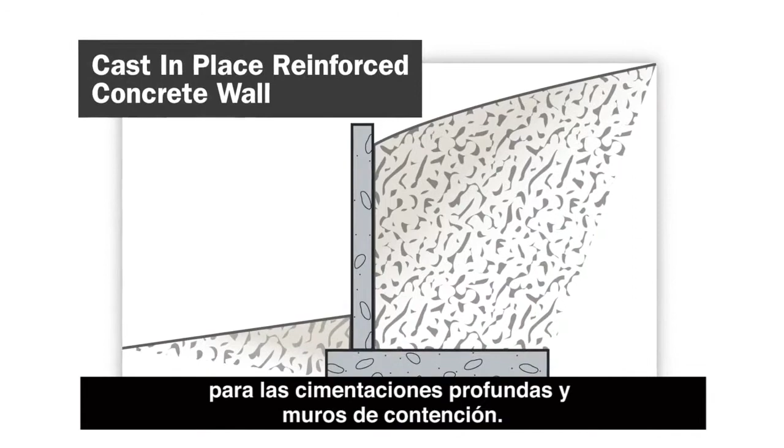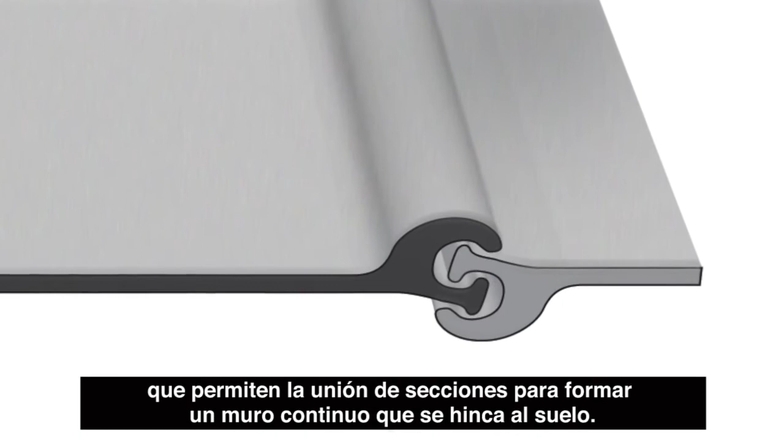Many different deep foundation and retaining wall solutions are available to engineers. Among the most accepted options is steel sheet piling, which by definition is a structural steel section with interlocks on the flange tips, enabling the joining of sections to form a continuous wall that is earth-tight. Sheet piling can be used in temporary or permanent applications for marine, environmental, and transportation projects.

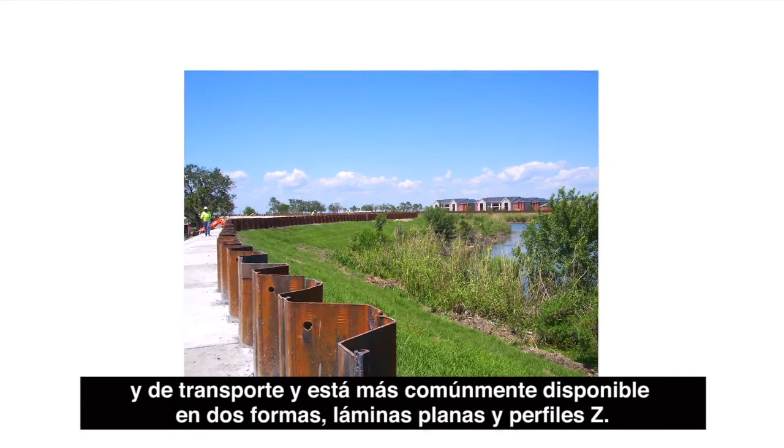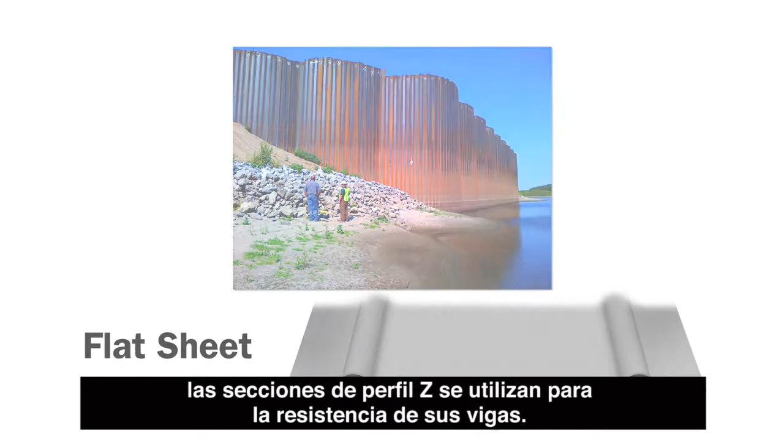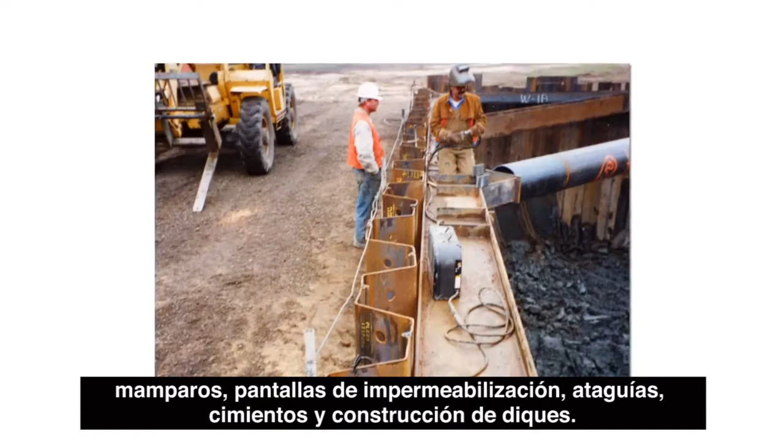It's most commonly available in two shapes: flat sheet and Z-profile. While flat sheet piling is used for interlock strength in circular structures, Z-profile sections are used for their beam strength. In essence, they are like a wide flange beam, in that each section has flanges and a web, the geometry of which gives it strength. These sections are typically used in bridge abutments, retaining walls, bulkheads, cut-off walls, cofferdams, foundations, and levee construction.

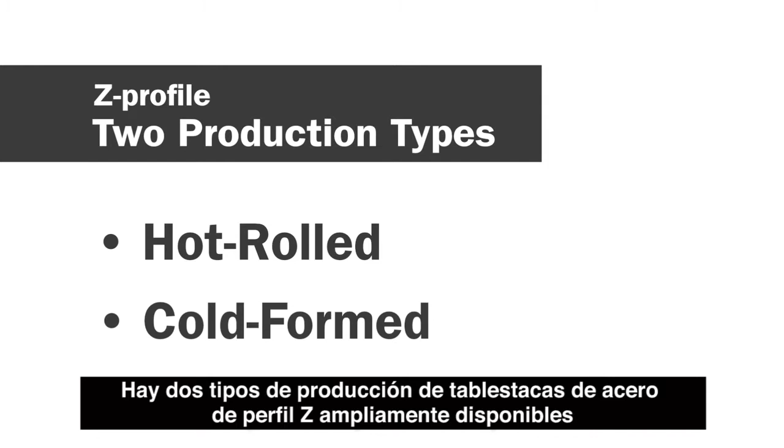Two production types of Z-profile steel sheet piling are widely available: hot-rolled and cold-formed. The important distinctions between the two can mean the difference between a successful project and one prone to problems. The names of each production type are generally descriptive.

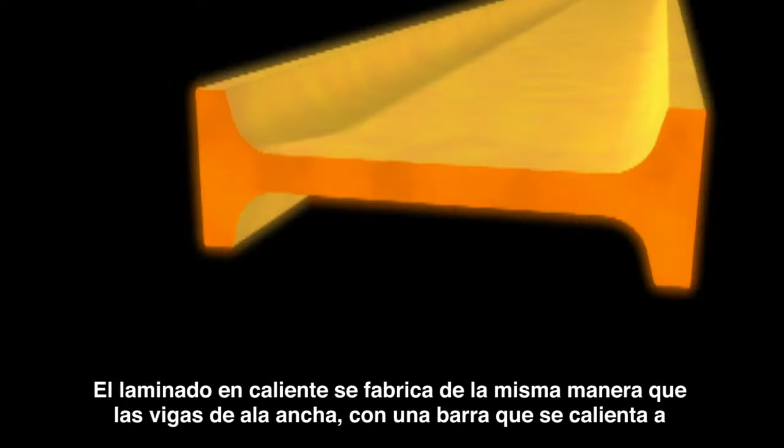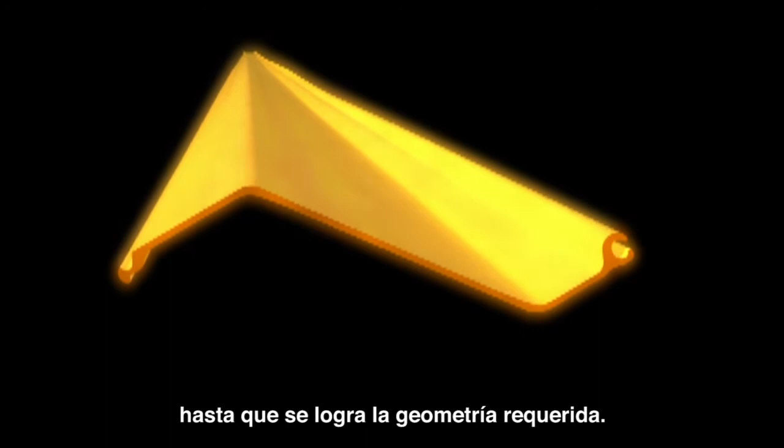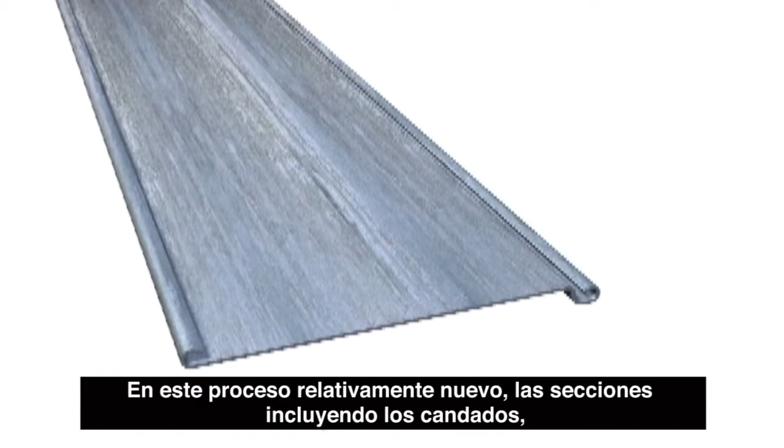Hot-rolled piling is manufactured in much the same way as wide flange beams, with a billet heated to approximately 2200 degrees Fahrenheit passed through a series of roll shapes until it achieves the required geometry. Cold-formed piling sections begin as cold steel coil, which is decoiled and sent through multiple rolling stands without preheating. In this relatively new process, the sections, including interlocks, are literally bent into shape.

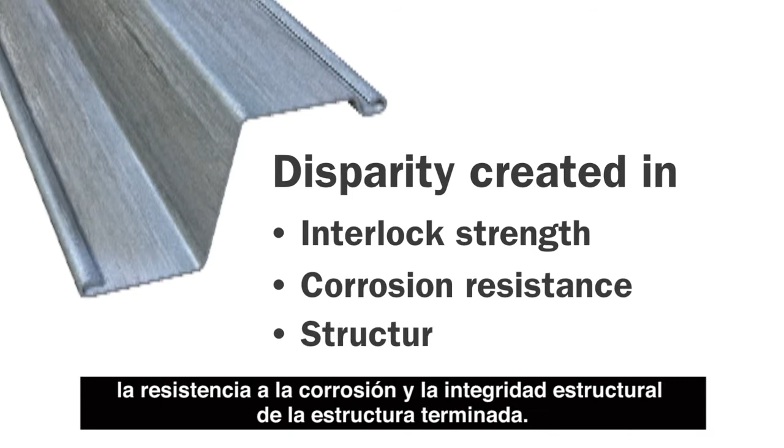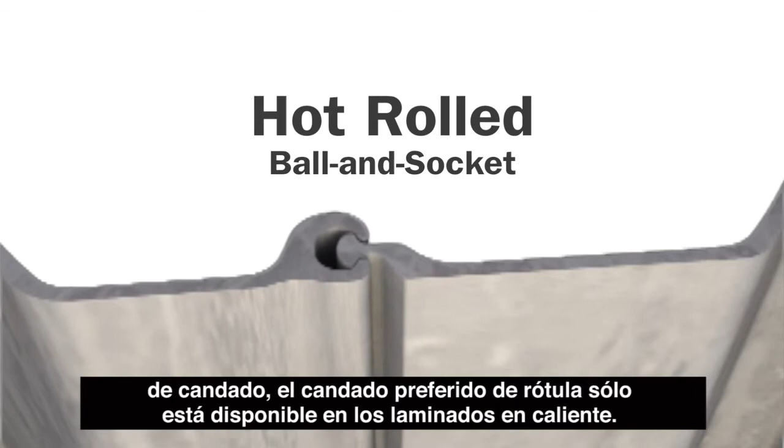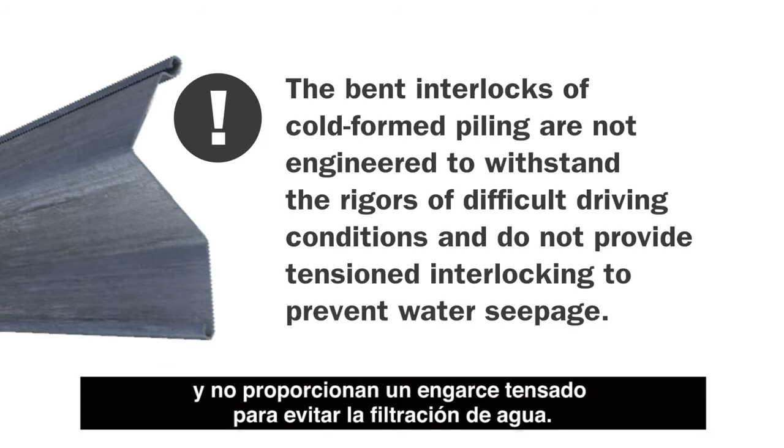The difference in manufacturing process creates a tangible disparity in the interlock strength, corrosion resistance, and structural integrity of the finished structure. While both cold-formed and hot-rolled piling sections feature interlocking connections, the preferred ball and socket interlock is only available with hot-rolled piling. Additionally, the bent interlocks of cold-formed piling are not engineered to withstand the rigors of difficult driving conditions and do not provide tensioned interlocking to prevent water seepage.

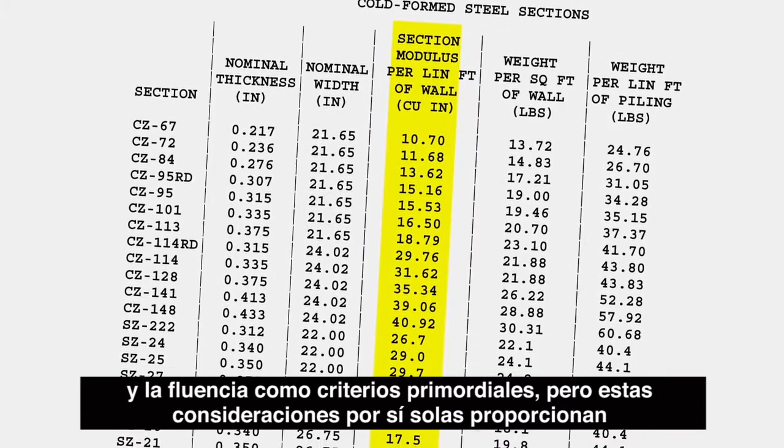To design a structure with sheet piling, engineers commonly look first to section modulus and yield strength as the primary criteria, but these considerations alone provide an incomplete picture of structural integrity requirements.

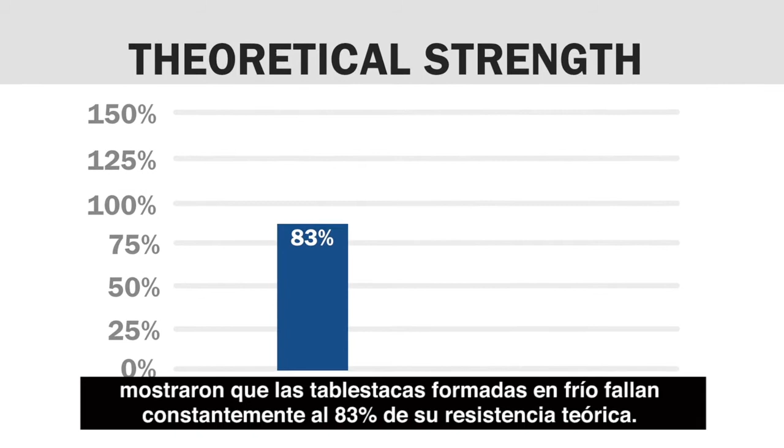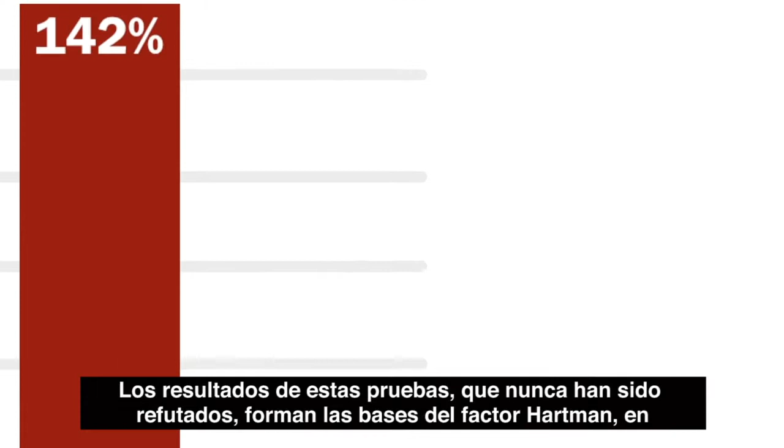Studies conducted by Dr. Richard Hartman at the State University of New York, Buffalo, showed cold-formed piling consistently failing at 83% of its theoretical strength. Conversely, like-sized hot-rolled piling was shown to maintain structural integrity up to 142% of theoretical strength. The results of these tests, which have never been disproven, form the basis of the Hartman factor, in which a factor of 0.83 should be applied to the strength properties of cold-formed sheet piling.

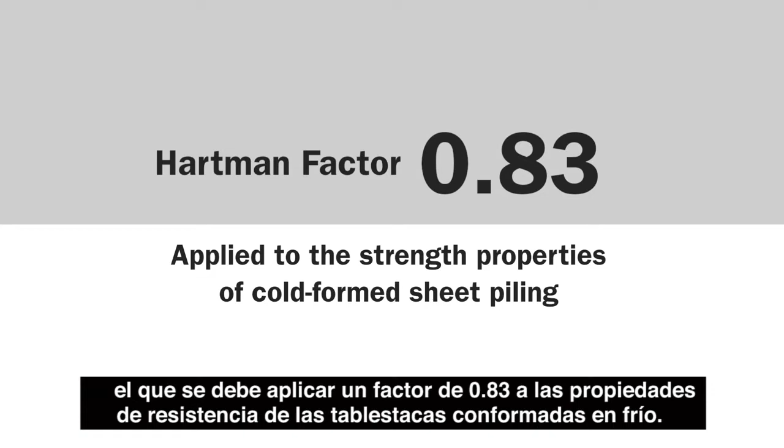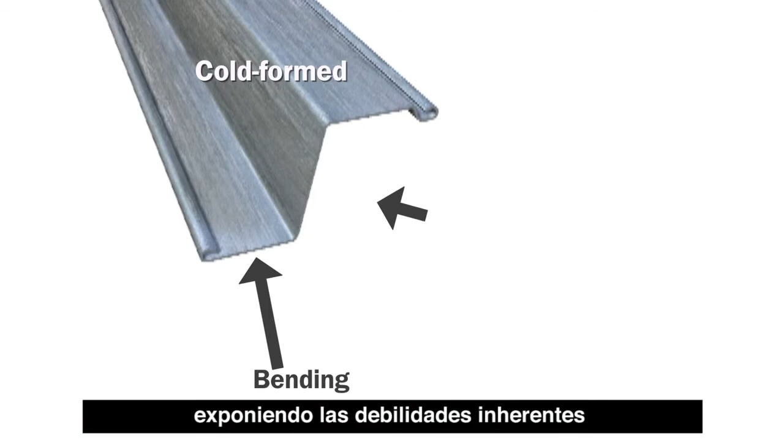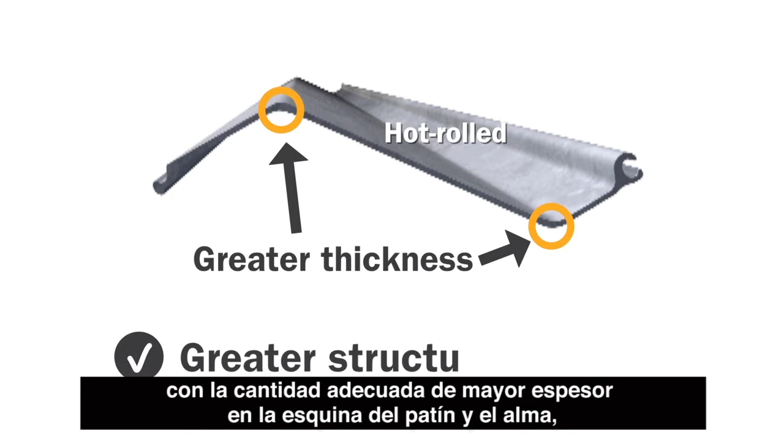While engineering calculations may account for the theoretical bending moment of a sheet piling structure, Dr. Hartman's study demonstrated additional transverse stresses on the wall, exposing the inherent weaknesses of cold-formed piling at the bends or corners of the piling sections. The production process of hot-rolled piling allows for a design with the appropriate amount of greater thickness at the corner of the flange and web, providing greater structural integrity than is possible with cold-formed sections.

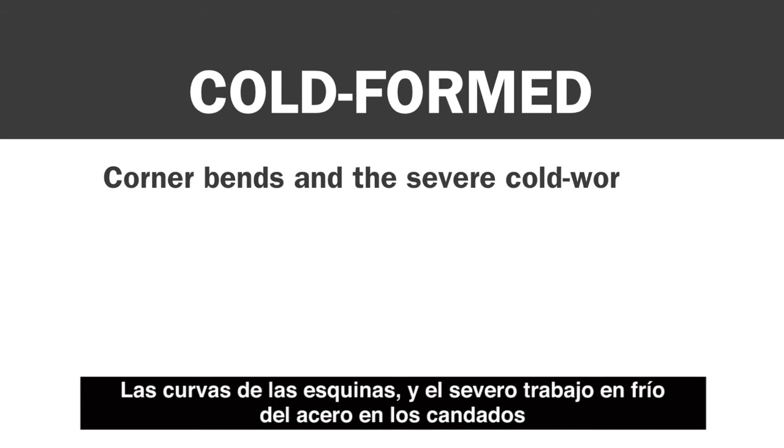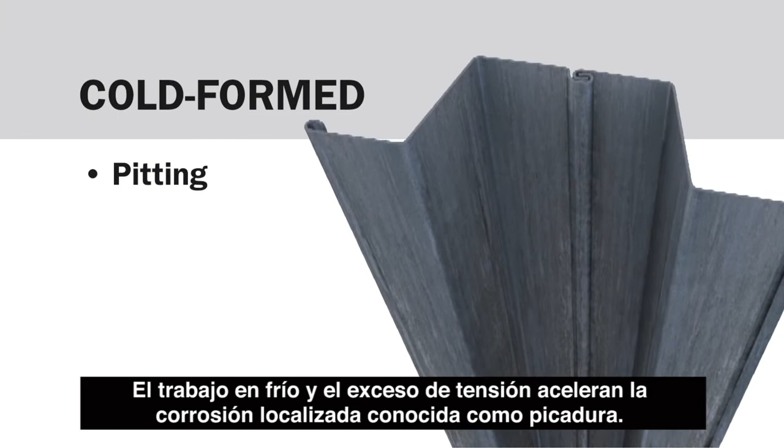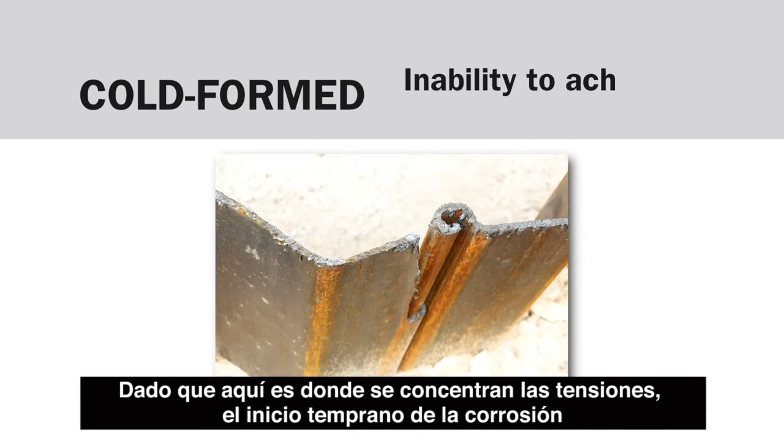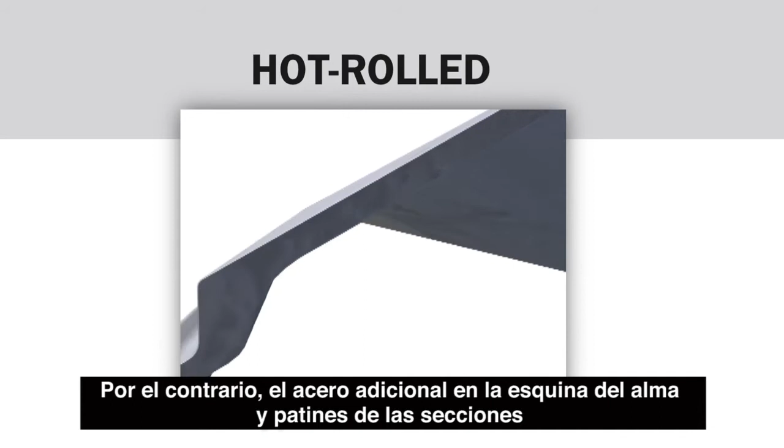The corner bends and the severe cold working of steel at the interlocks of cold-formed piling present another significant concern for the specifying engineer: corrosion. Cold working and overstrain accelerate localized corrosion known as pitting. Cold-formed sheet piling is therefore more susceptible to corrosion at the bends. Since this is where the stresses are concentrated, the early onset of corrosion will mean an inability of cold-formed sheet piling to achieve their design life. In contrast, the extra steel at the corner of the web and flanges of hot-rolled sections provide the capacity to manage the localized stresses.

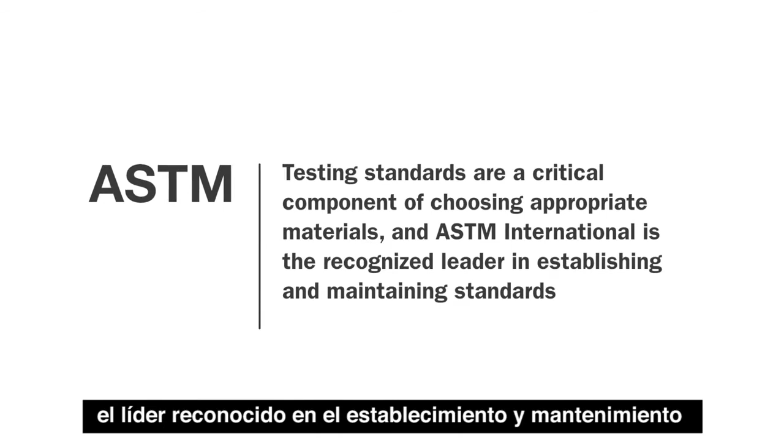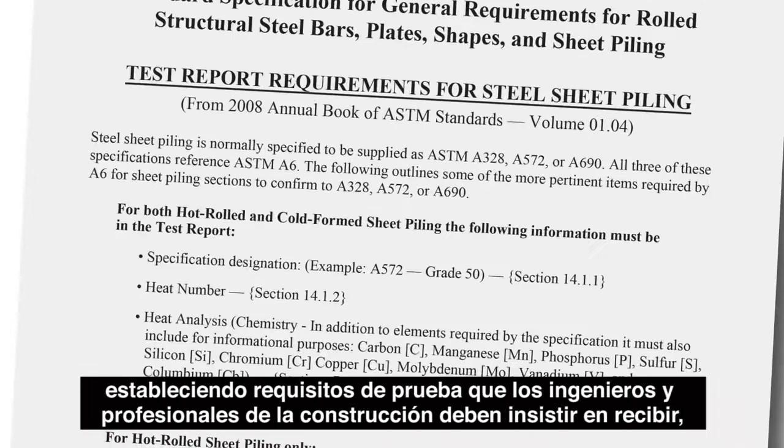Testing standards are a critical component of choosing appropriate materials, and ASTM International is the recognized leader in establishing and maintaining standards for manufactured products. ASTM Standard A6 deals specifically with rolled structural steel sheet piling, establishing testing requirements that engineers and construction professionals should insist on receiving, including grade of steel, heat number—a designation of exactly when and where the raw steel was created—heat analysis, detailing the specific steel chemistry of the heat, and nominal section size.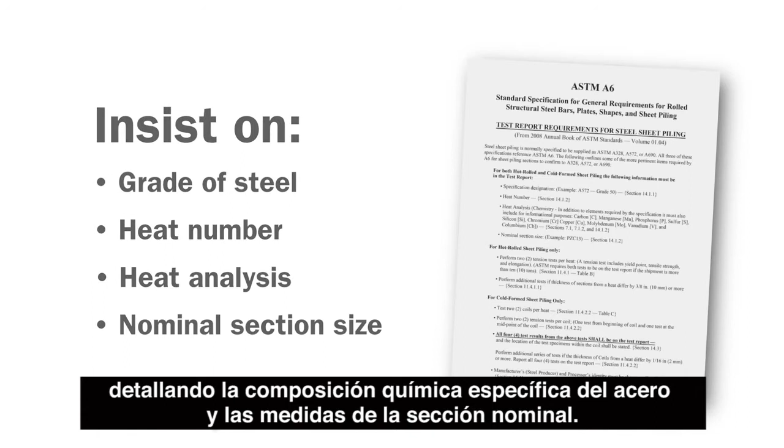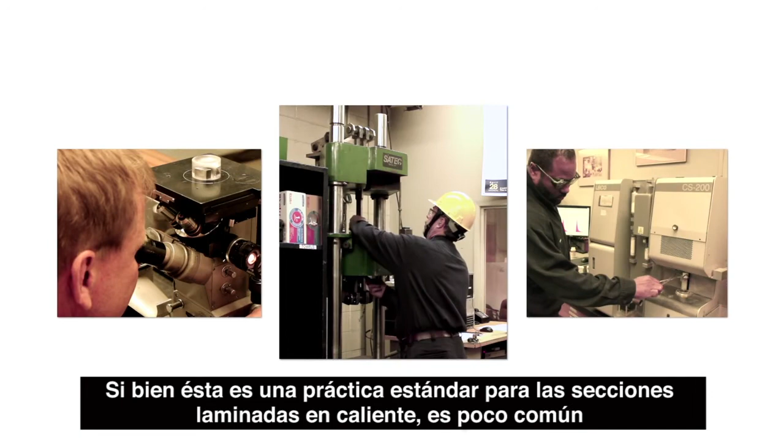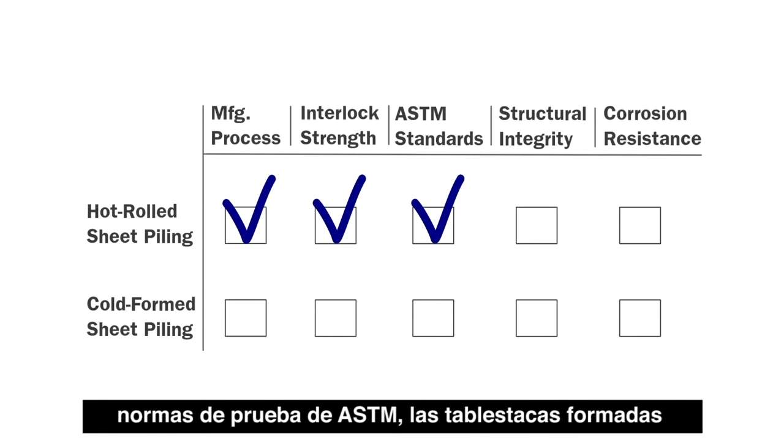Also included in ASTM Standard A6 is the requirement for 2 tension tests per heat. While this is a standard practice for hot-rolled sections, it is uncommon for cold-form sheet piling suppliers to have this information available. From the manufacturing process to interlock strength and even the ability to meet ASTM testing standards, cold-form sheet piling simply doesn't measure up to the structural integrity and corrosion resistance of hot-rolled sheet piling.

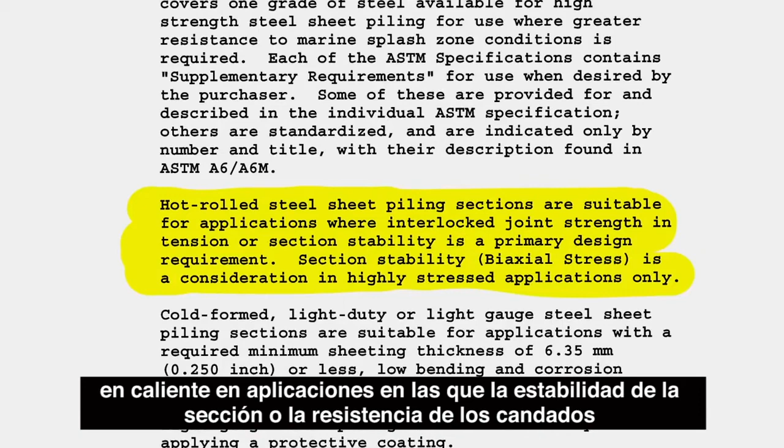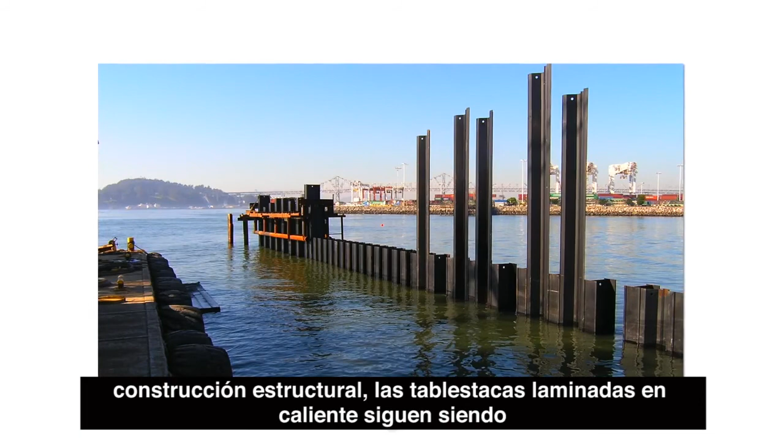These are among the reasons that the U.S. Army Corps of Engineers, in the Unified Facilities Guide Specifications 31 41 16, called for hot-rolled piling to be used in applications in which section stability or interlock joint strength is a primary design requirement. In both permanent and temporary applications, such as transportation, deep water, and structural construction projects, hot-rolled sheet piling remains the most reliable and safe engineered solution.

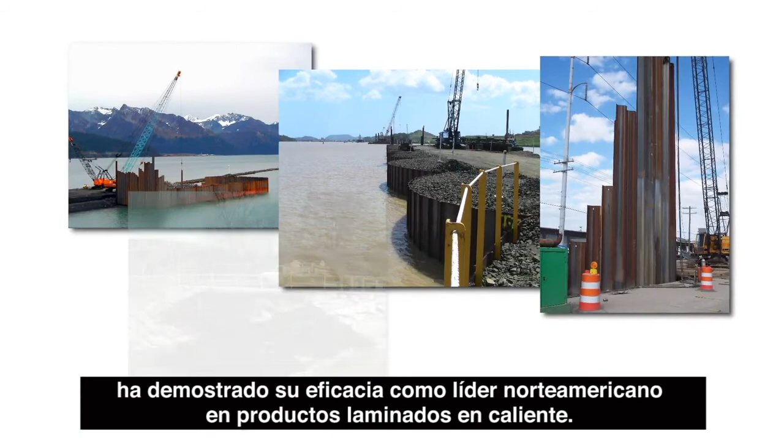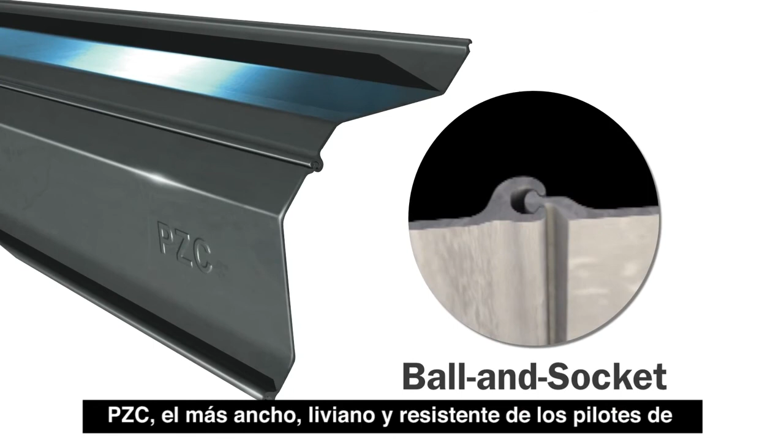From the bays of Alaska to the levees of New Orleans, Gerdau sheet piling has demonstrated its effectiveness as the North American leader in hot-rolled piling. Rolling both flat sheet, PS, and Z-profile, PZC, Gerdau provides shapes to solve even the most stringent geotechnical challenges. PZC, the wider, lighter, and stronger configuration of Z-profile piling, features a ball and socket interlock that allows for easier and more flexible setting and durability through driving.